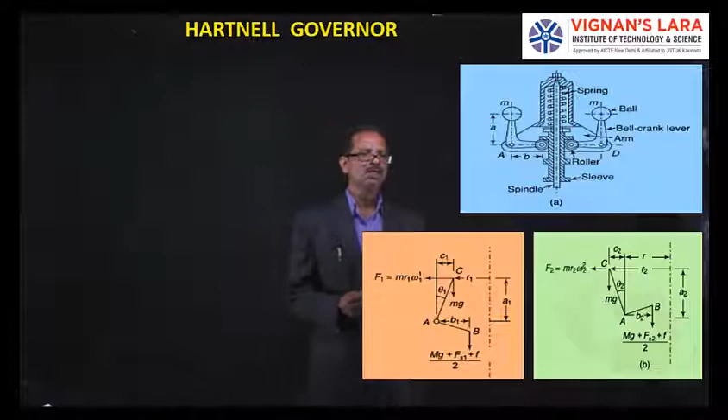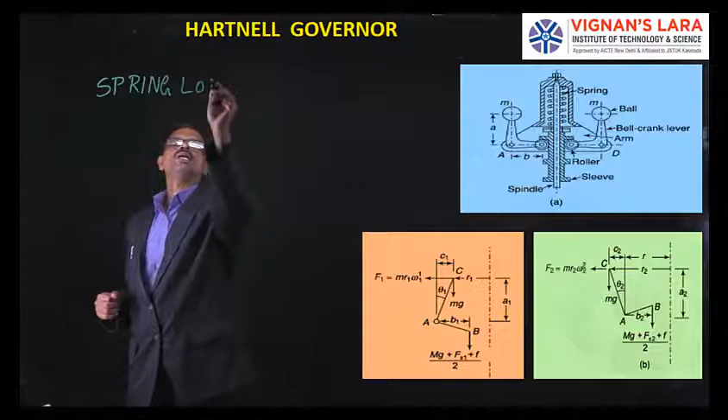So this is a spring loaded governor. Here we use a spring, and that spring is placed initially under compression. You can see the diagram on the right top corner showing the construction. The spindle or shaft, connected to the prime mover by a gearing arrangement, rotates with a certain speed. That spindle is loaded with a spring, so a closed coiled or open coiled spring is placed with the spindle as the main element.

Then on that we place the body. The sleeve is available in the bottom portion of the spindle, and there are two bell crank levers placed on the left and right side of this sleeve. The sleeve, placed directly on the spindle, is loaded with a spring, and two bell crank levers are attached to the governor. The line diagram shows the bell crank levers are vertical in nature.

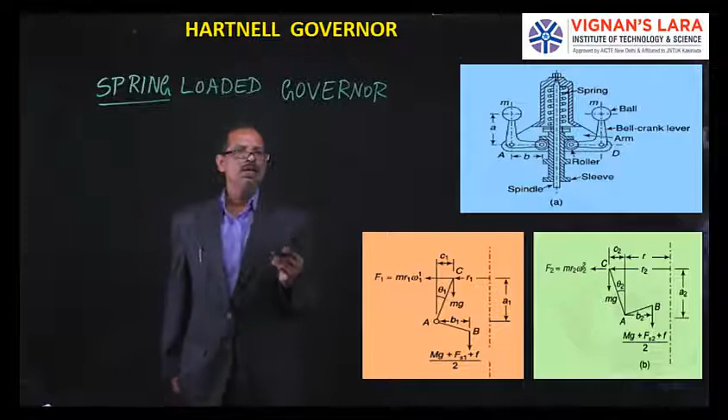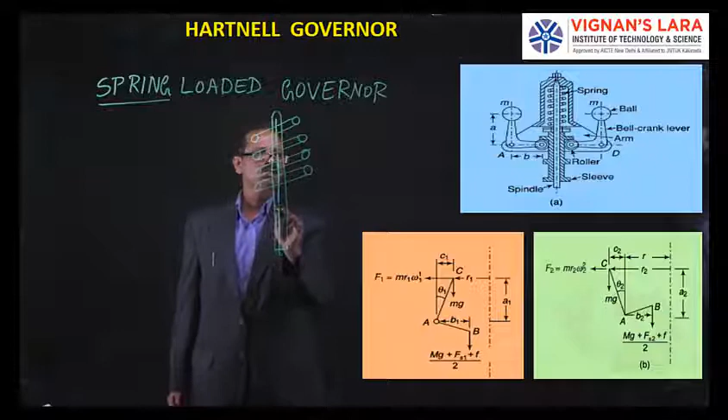Let me draw a simple line diagram of this Hartnell governor. There is a spring which is mounted on the spindle. This is the spindle, and there is a spring which is initially under compression, so a number of turns are available for this spring. Then you have your sleeve, and this entire assembly is kept under a body.

There is a nut which tightens for initial compression. So here you can see there is a sleeve. This is the spring, and this is the nut, and this is the spindle.

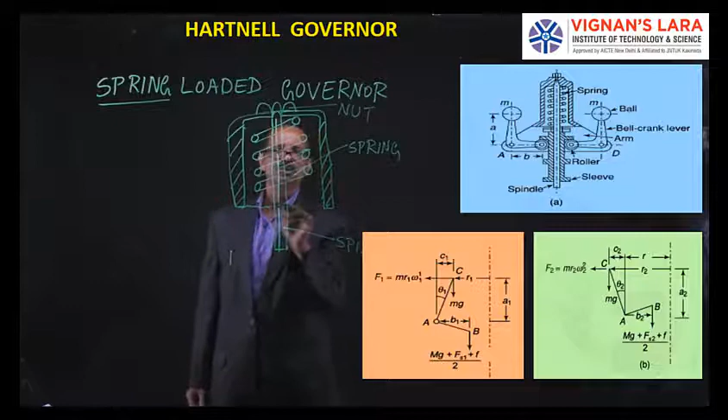Then you have two bell crank levers which are attached to the sleeve. This is the sleeve, so bell crank levers are placed like this. This is the ball end and this is the roller end.

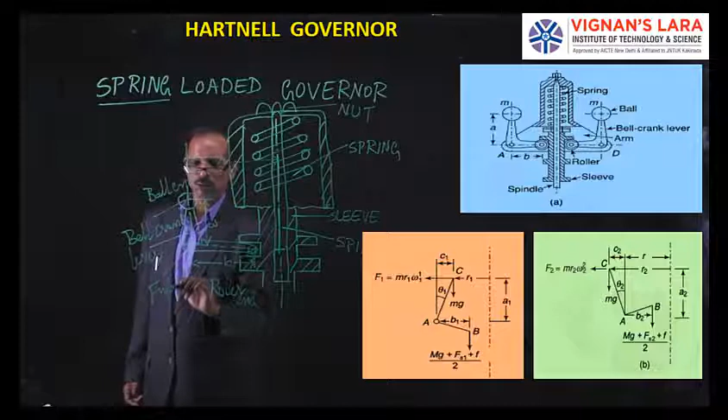And we define the parameters like this is A, and this is B. And we define the radius of rotation R. So A is the vertical length of this bell crank lever, B is the horizontal length of this bell crank lever. So this is the bell crank lever, and this is the fulcrum point.

Now when this spindle is rotating, the entire assembly also rotates because there is a connection between the other end as well. So the other end is also shown on this side, like this. So the entire assembly, that is the entire governor, is revolving.

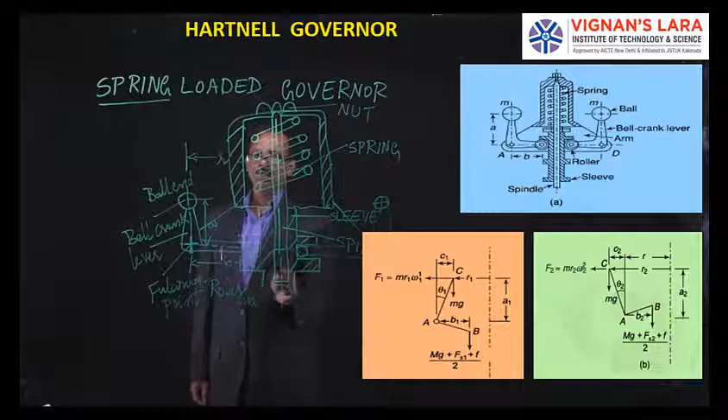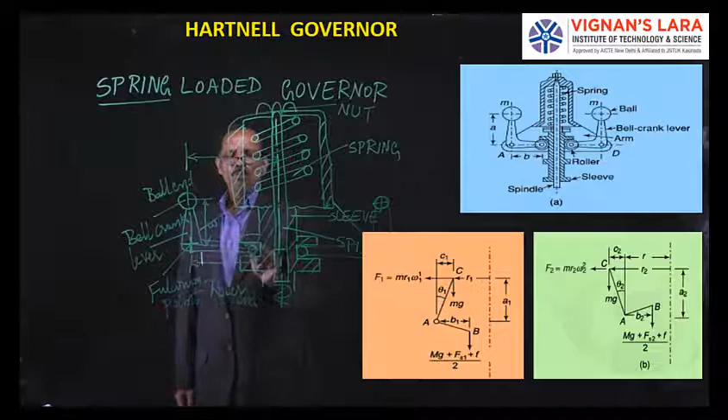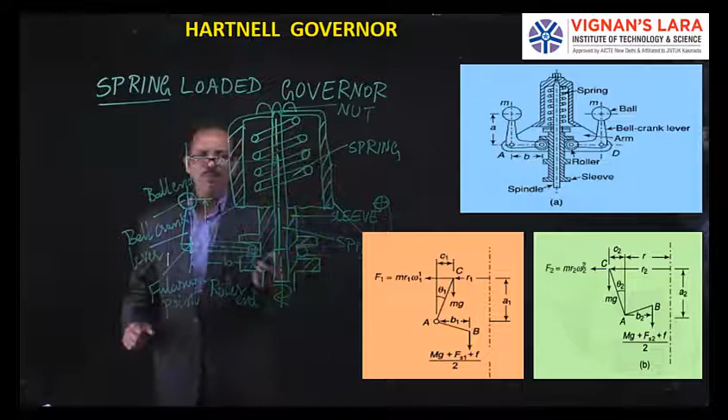Let us assume if the speed is increased, then what happens? These bell crank levers, with their fulcrum point here, will push the sleeve upward. That means when the speed increases, the bell crank lever will, with this center, shift and move in the upward direction like this.

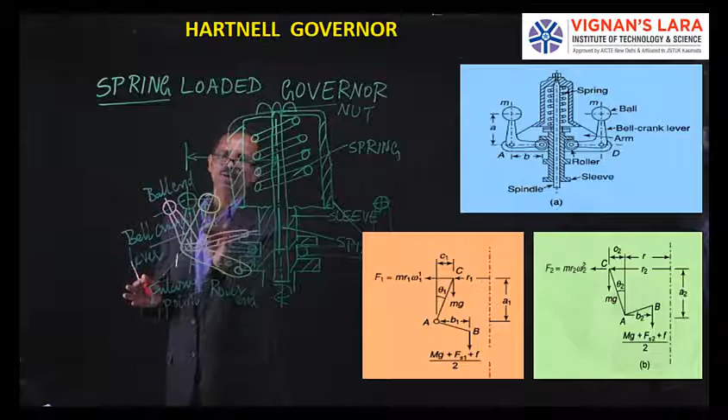Whereas when the speed decreases, the bell crank lever will take the orientation like this. So this way the bell crank lever, with this pivot point, will move either outward or inward.

So when it moves outward and inward, it presses the sleeve, and the spring is either further compressed or the compression is reduced, isn't it? So when the sleeve moves up or down, the spring force is either reduced or increased.

So these are the two extreme cases shown in the diagram at the bottom. One is speed reduction and the other is speed increase. Case 1 is speed reduction, and this is case 2. Case 1 is lower speed, and case 2 is the higher speed.

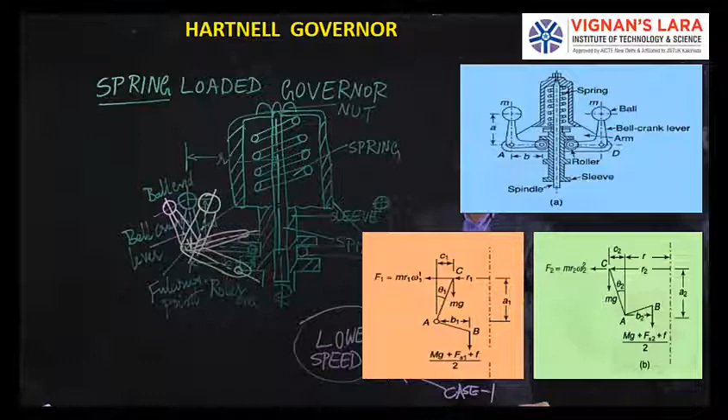Here you can see this is the spindle, connected to the prime mover through a gearing arrangement. On this spindle we keep a spring, and on this we have a body connected to the sleeve, and here there is a bell crank lever with two ends. One end is connected to the ball end, which is nothing but the fly ball where the mass is M, force is mg.

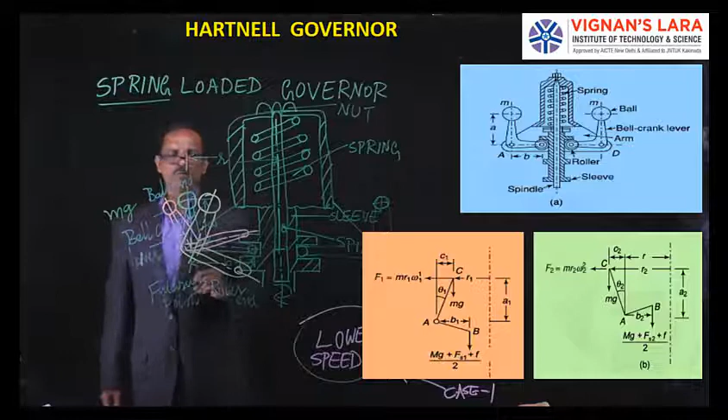Okay, and here the sleeve mass also comes in, which is Mg plus spring force Fs plus or minus F by 2. And what about centrifugal force? The centrifugal force acts like this, F, and this is Fs.

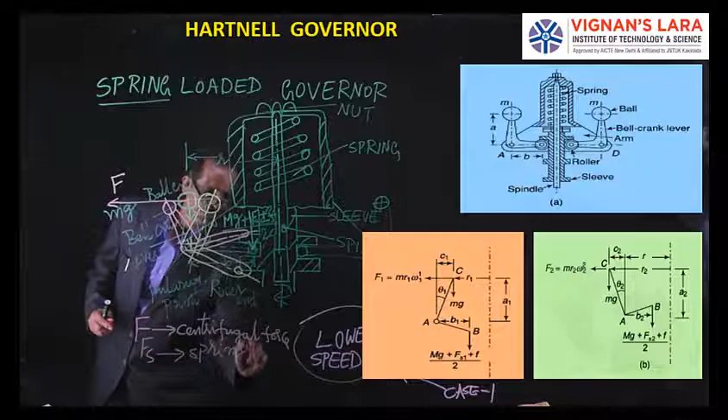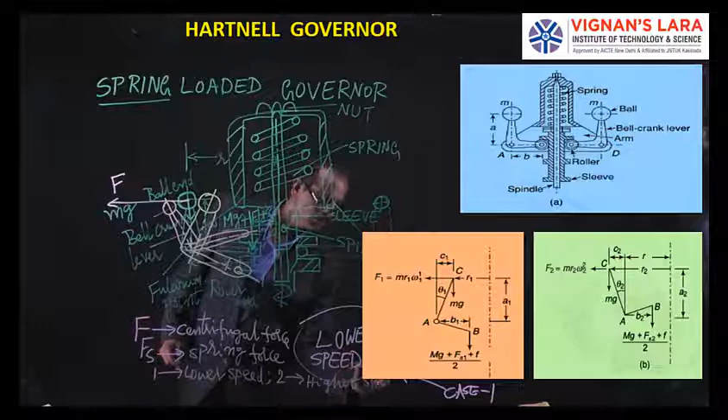So I am using F for centrifugal force and Fs for spring force. Fs is for spring force and F is for centrifugal force. If I use letters 1 and 2, it indicates one is lower speed and the other is higher speed. So there are two extreme positions, one is lower speed and the other is higher speed.

So when the sleeve lifts up, that is at higher speed. When the sleeve moves down, it is lower speed. So initially the spring is under compression. So when the speed increases, the spring force is further increased because it is compressing.

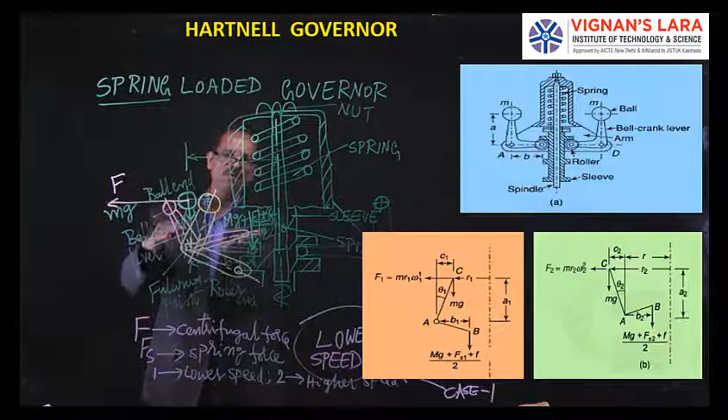So as you see the diagram, this is under some compression. When the speed increases, the fly ball tries to move away from the center, that is outward. Then this horizontal link of the bell crank lever will push the sleeve upward, further compressing the spring. So the spring force is increased.

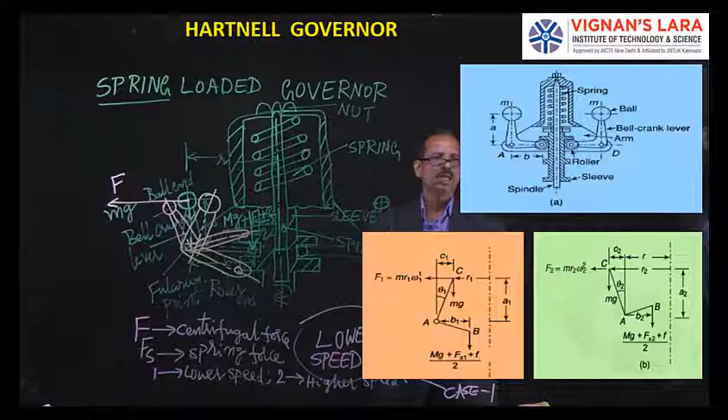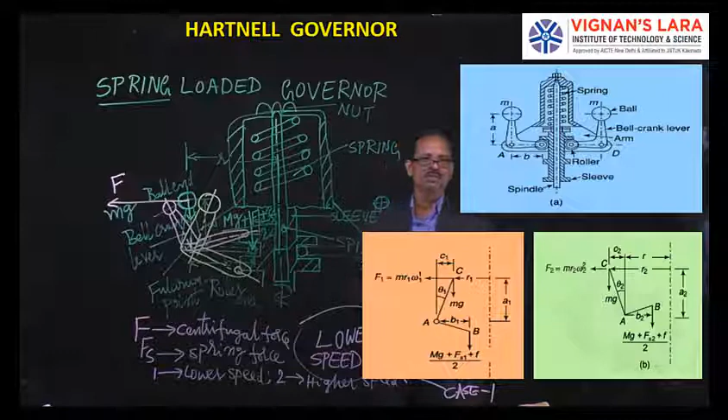Whereas if the speed drops, the sleeve moves down, and the initial compression is relaxed. So the position we have shown here is simply the spring at mean position, meaning the bell crank levers are vertical in the vertical arm and horizontal in the horizontal arm. The analysis part will show how we can find out different spring forces, the obliquity effect of the arms, and how to calculate the stiffness of the spring required for this governor.

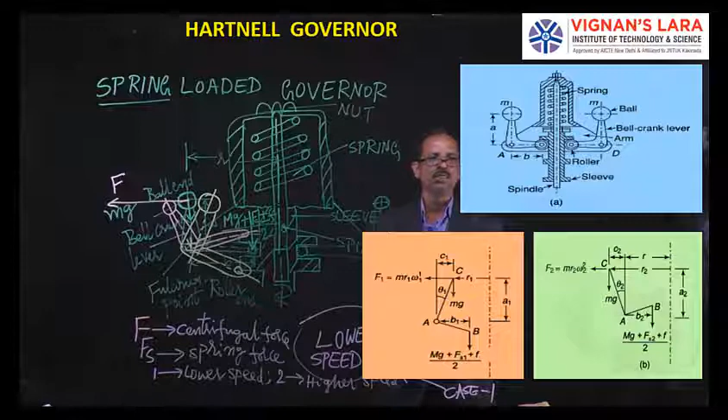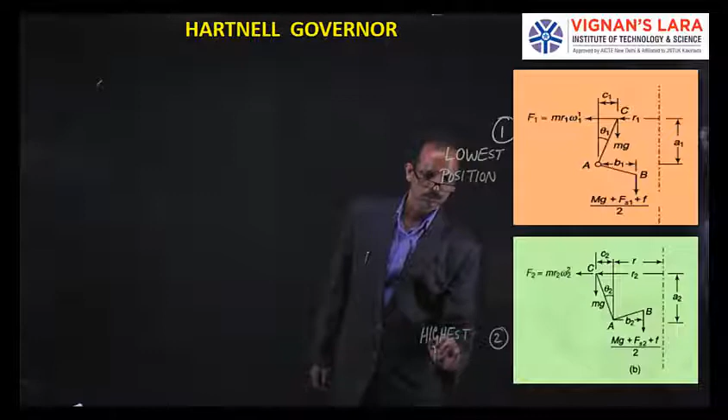Now let us see the two extreme positions we discussed, the lowest speed and highest speed positions. As I said, I will indicate this as one, that is the lowest position, and this is the second one, the highest position.

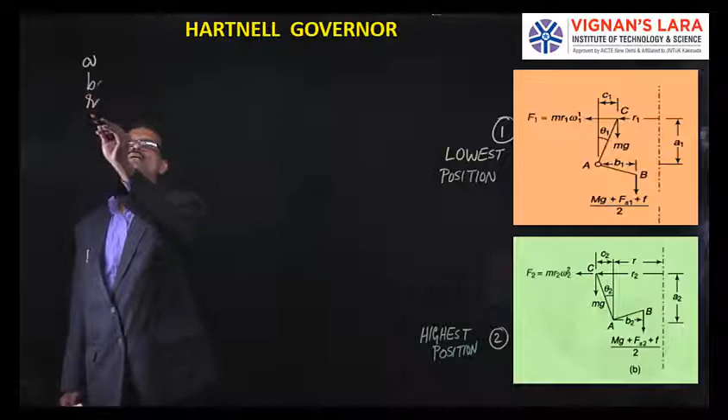The nomenclature I have already stated: A and B. A is the length of the bell crank lever's vertical arm. B is the length of the horizontal arm of the bell crank lever. R is the radius of rotation. Small m is the mass of the ball. Capital M is the mass of the sleeve. F is centrifugal force and Fs is spring force. So these are the nomenclature: A, B, R, F, Fs.

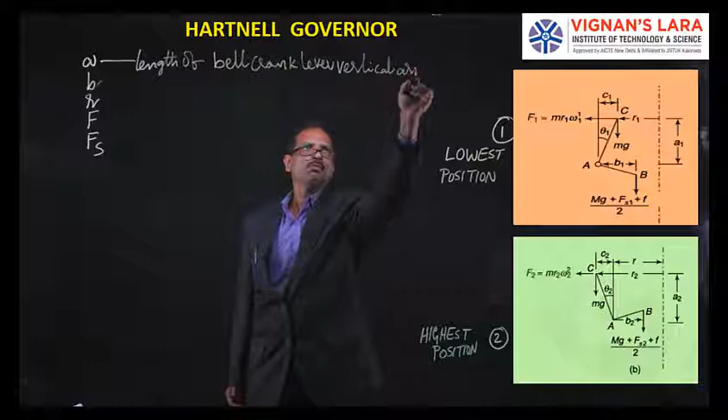So A is the length of the bell crank lever's vertical arm. B is the length of the bell crank lever's horizontal arm. R is the radius of rotation. F is centrifugal force.

Fs is spring force. I use subscript 1 for low speed and 2 for high speed. So I will incorporate R1, R2, F1, F2 and Fs1 and Fs2, which indicate lower speed and higher speed values. One more thing, S is stiffness of spring.

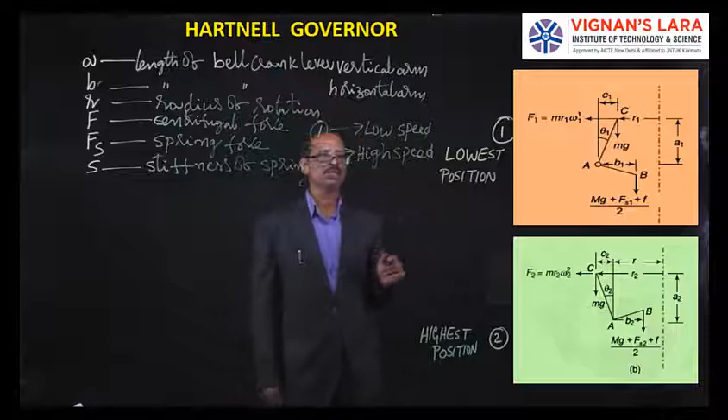So on the right hand side, the free body diagram of the force analysis is shown. You have your axis of rotation, and you can take the vertical arm and horizontal arm of the bell crank lever. This is the pivot point. This is the horizontal arm. When it moves down, this is the vertical arm. We define this as A and this as B, and this is the fulcrum point, say A.

Then the forces that act are self weight mg, and the centrifugal force F1, and here the spring force as well as the sleeve force, that is Mg plus Fs1 plus f by 2. I have taken the frictional force F, and Fs1 is the spring force at lower speed, and Mg is the total weight of the sleeve. Half will be shared by this side, another half will be shared by the other side of it, isn't it?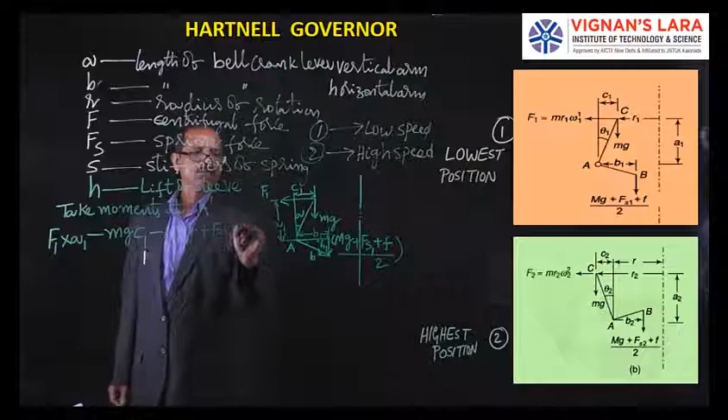Taking moments here, centrifugal force F1, perpendicular distance A1, which is anti-clockwise, I will take as positive. Then mg is the self weight acting downwards, which is clockwise, so negative, minus mg into perpendicular distance C1. Then this part is clockwise, negative: mg plus Fs1 plus F by 2, into what is the perpendicular distance from this point, B1, equated to 0.

So let us keep attention on this equation. Moments are taken from A, the forces are three: F1, and mg plus Fs1 plus F by 2. These forces cause the moments, that is F1 into A1, anti-clockwise moment taken as positive, then mg self weight into perpendicular distance C1, then mg plus Fs1 plus F by 2 into this distance B1. So the sum of the total is 0.

Why have I taken F as positive? Because the sleeve is moving down, so the friction is up. When the sleeve moves down, the friction is in the opposite direction, which we take as plus F, isn't it?

Now rewrite this equation: F1 A1 is equal to mg C1 plus mg plus Fs1 plus F by 2, into B1.

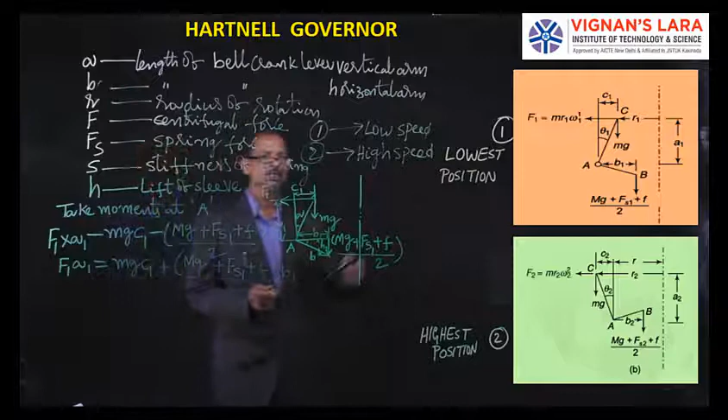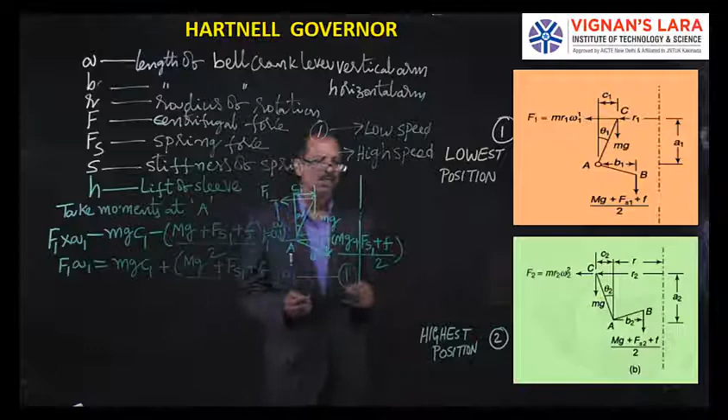So similarly, if you write the second one, that is the highest position, let me write this as equation number 1. Highest position: now the ball will be moving this way. Then this horizontal arm will be lifting up. This is, say, initially A, this is B, then these horizontal and vertical distances are B1 and A1.

Now at the highest position, the vertical arm moves like this and the horizontal arm lifts like this. Then this distance is called C2 and this distance is called H2. And this is B, then its projection, this is B2, and this projection is A2.

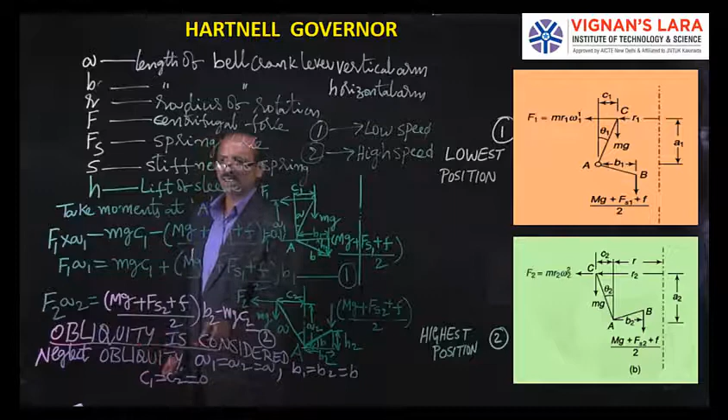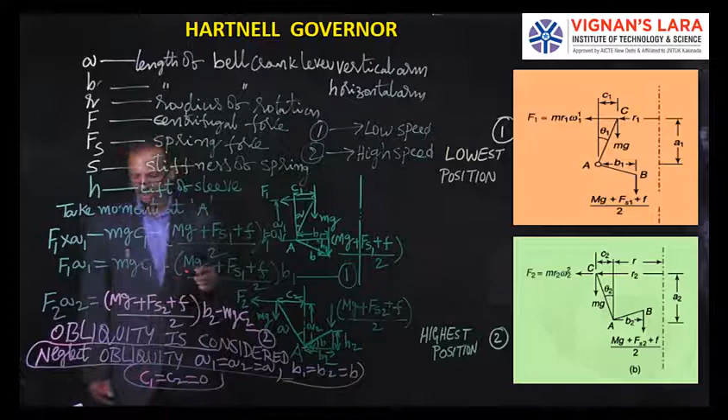Suppose in the problem, if we are asked to consider obliquity, then you do your analysis with the above notation. Suppose if it is not asked, then we always prefer to take this case, that obliquity is simply neglected. That means A1 is equal to A2 is equal to A, B1 is equal to B2 is equal to B, C1 is equal to C2 is equal to 0. So if I write this way, how these equations will change and how we can find out the stiffness of the spring required, that we will see.

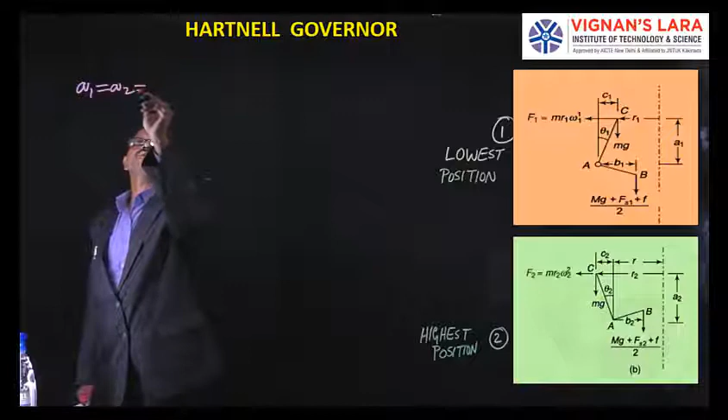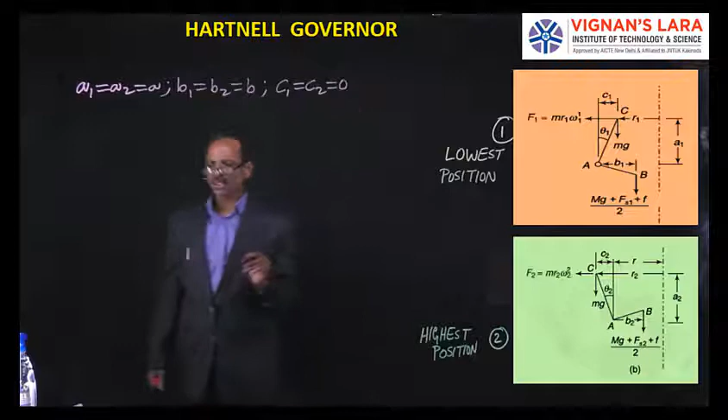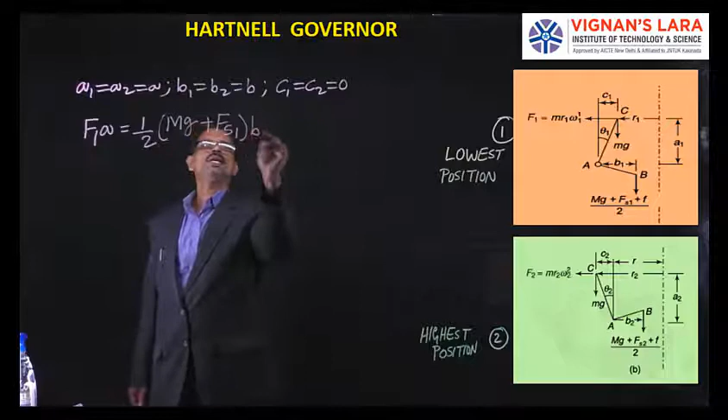If you neglect the obliquity effect of arms, your A1 is equal to A2 is equal to A, B1 is equal to B2 is equal to B, C1 is equal to C2 is equal to 0. Then equation number 1 and 2 will change like this: F1A is equal to half mg plus fs1 into b, because the second part, mg into c1, where c1 is 0, becomes 0. So by writing C1 is 0, C2 is 0, equation 1 will be converted like this.

Then equation 2 will convert to F2A is equal to half into mg, plus Fs2 into B. This is equation number 4.

So what I did, I simply took A1 is equal to A2 is equal to A, B1 is equal to B2 is equal to B, C1 is equal to C2 is equal to 0. Then my equations convert to F1A is equal to half into mg plus Fs1 plus F into B, and half into mg plus Fs2 plus F into B.

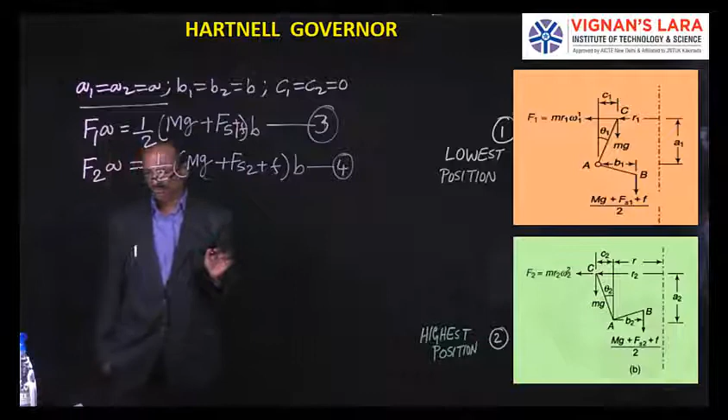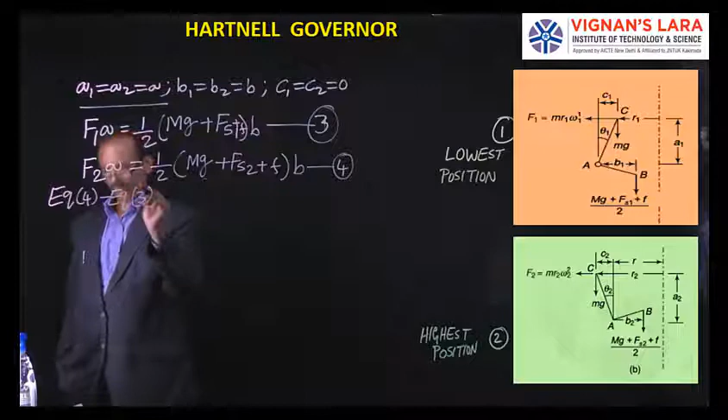So if I write equation 4 minus equation 3, that means F2 minus F1 into A is equal to Fs2 minus Fs1 into B by 2. So equation 4 minus 3, that is F2 minus F1 into A is equal to Fs2 minus Fs1 into B by 2. So I can write Fs2 minus Fs1 is equal to 2A by B.

So Fs2 minus Fs1 is 2A by B into F2 minus F1. This is equation number, say 5.

What does this equation represent? The change of spring force, from position 2 to position 1, is equal to 2A by B into F2 minus F1. Let us rewrite this.

So we said H is lift, and S is stiffness of spring. So what is the change of spring force? That is nothing but lift into stiffness of the spring. Spring force difference is total lift into stiffness of the spring, S. So Fs2 minus Fs1 is equal to H into S.

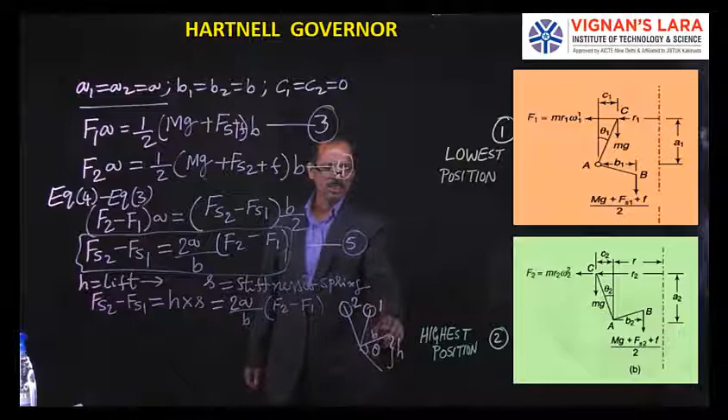If you consider this angle as theta, the total angle, and this horizontal arm is b, then for small angular displacements we can write this as r theta, like a sector. This b theta will become h. This sector length can be taken as a small distance where the sector radius is b and the angle is theta. So B theta is equal to h.

So I can replace this like this: B theta, h place here, b theta I will write. Then h is replaced, b theta into S is equal to 2A by B into F2 minus F1. So what I did is the lift of the sleeve from the mean position, bottom as well as top, total is h. The angular displacement is theta. Then this horizontal lever is b. So b theta is equal to h, and that b theta part replaces h, giving B theta into S is equal to 2A by B into F2 minus F1.

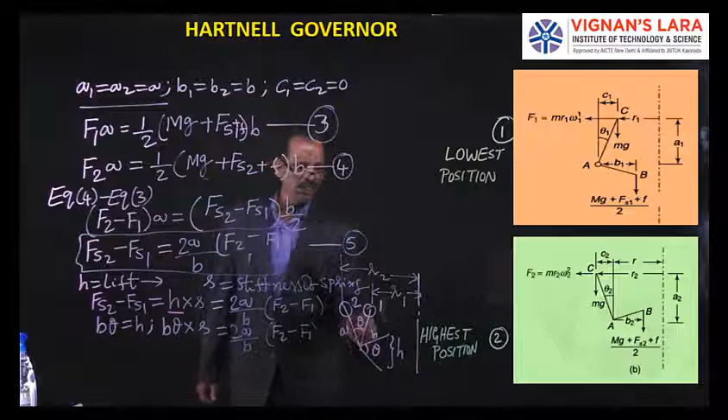Similarly we can see the position of this radius: this is r1 and this is r2. When this moves like h, the vertical arm moves like r2 minus r1, and this angle is also theta. So we can write A theta is equal to r2 minus r1. A is the vertical arm length, theta is the angular position. The position of this ball moves from 1 to 2, the difference is r2 minus r1, which is equal to A theta.

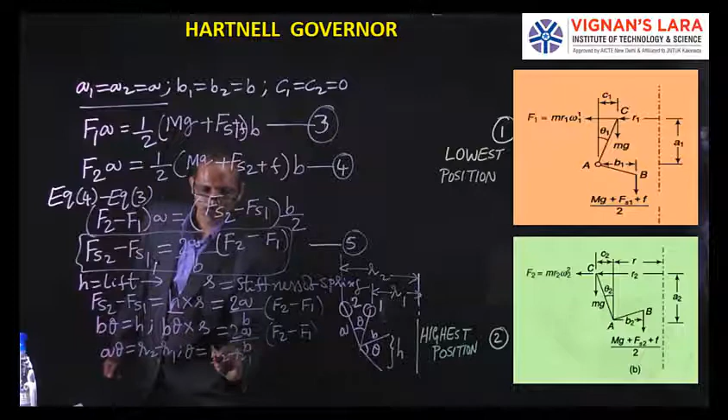So we can write theta is equal to r2 minus r1 by A. I will substitute this theta value in the above equation; call this equation number 6. So theta is substituted in equation 6.

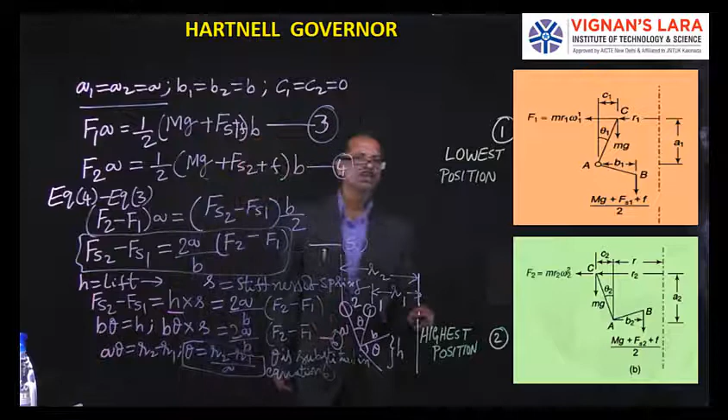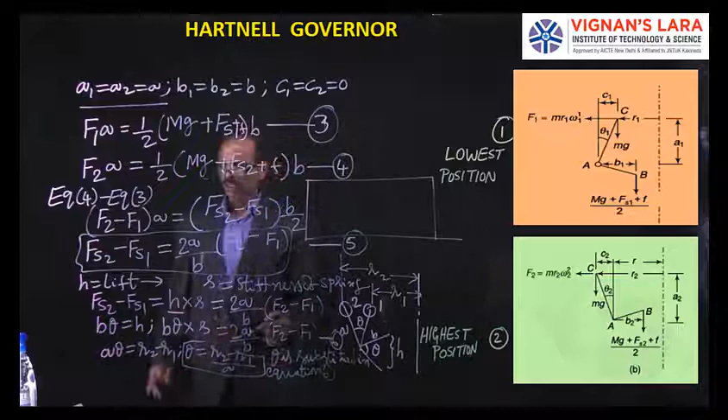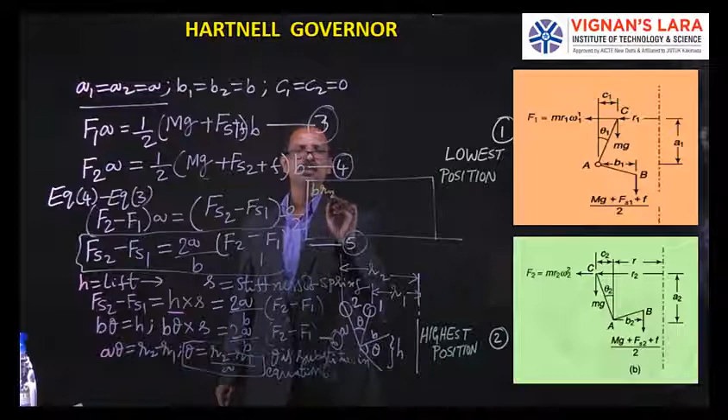If you substitute this value here, b into r2 minus r1 by a, into S, is equal to 2A by B into F2 minus F1.

What I did: I took theta value, B into R2 minus R1 by A, into S is equal to 2A by B into F2 minus F1. From here I can calculate S is equal to 2A square by B square, since A into A becomes A square, B into B becomes B square, then into F2 minus F1 by R2 minus R1. This is the final equation I require, equation number 7. So finally, S is equal to 2A square by B square into F2 minus F1 by R2 minus R1.

This indicates the stiffness of the spring is a function of the vertical arm and horizontal arm lengths of the bell crank lever, and the centrifugal forces F2, F1 along with the radius of rotation R2, R1. With this information we can solve the problems.